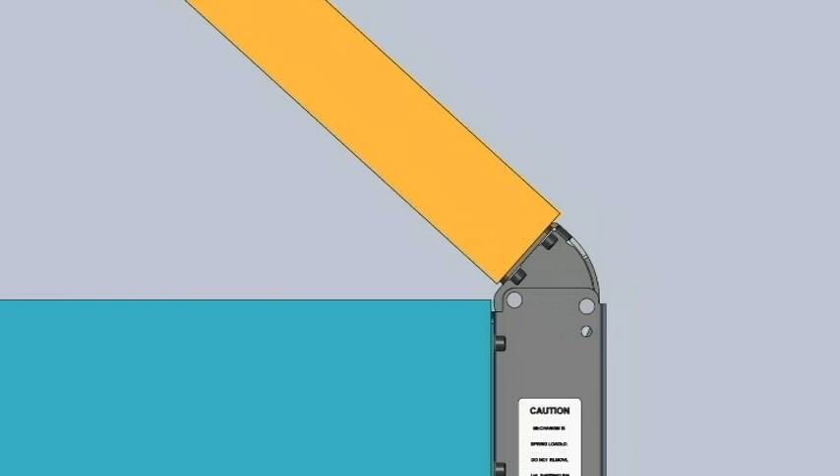If less than 90 degrees of rotation is desired, a built-in open stop can be specified in your hinge to limit the travel to an open position anywhere between 45 and 90 degrees. In the case shown here, the open stop was cut at 45 degrees when it was manufactured.

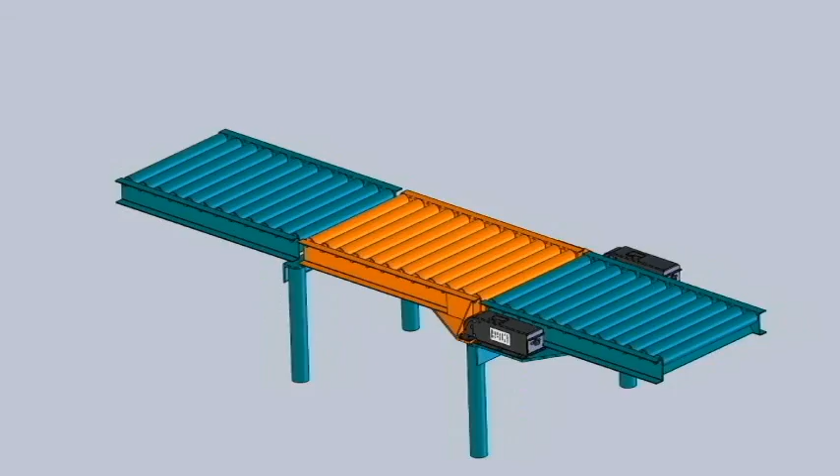For simplicity, Vectis refers to the rotating load that needs to be counterbalanced as a lid, whether the load is actually a lid, a pump, an enclosure, a conveyor drawbridge, or whatever your application requires. The VectisDYO app needs just 3 critical parameters to define the lid, or load, you wish to counterbalance.

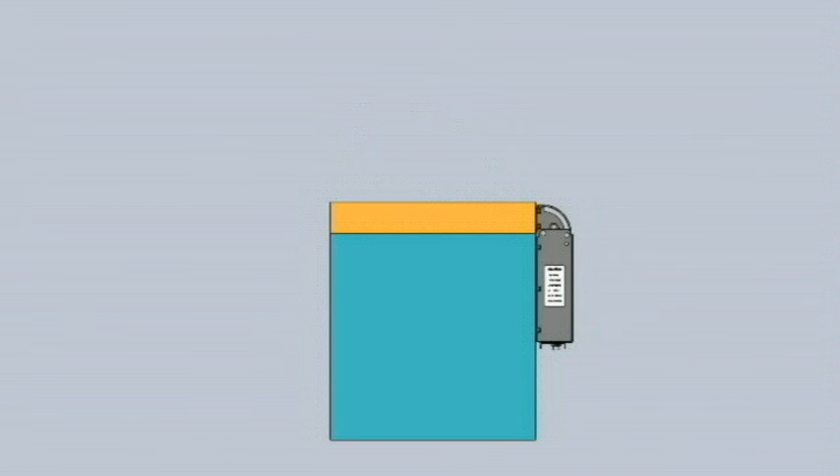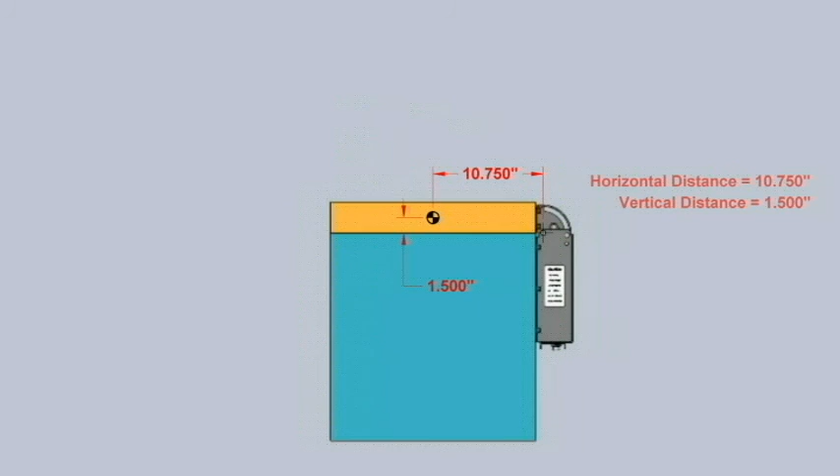In the case of the simple lid shown here, the lid is 20 inches deep and 3 inches high. This example lid is of uniform density, so the center of gravity, or CG, is in the center of the lid profile. Looking at this lid's profile in the closed position, the 50-pound weight of the lid is applied at the lid's center of gravity, or CG, which is 10.75 inches to the left of the hinge pivot axis and 1.5 inches above it.

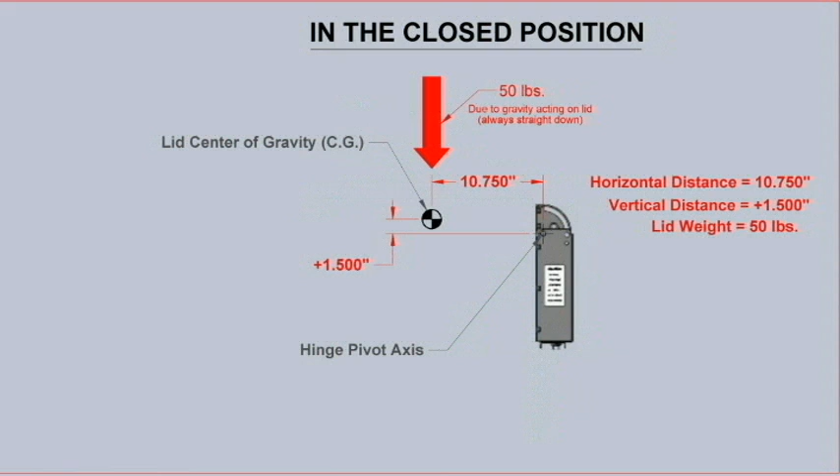Vectis always defines the lid parameters in the closed position. For this lid, the 3 parameters would be horizontal distance, 10.75 inches. The horizontal distance is always positive. Vertical distance, plus 1.5 inches is shown here. The vertical distance can be either plus or minus depending on whether the lid center of gravity is above or below the hinge axis. Lid weight, in this case, 50 pounds.

As shown here, gravity produces a downward force of 50 pounds focused at the center of gravity, which, in the closed position, is 10.75 inches to the left of the pivot axis. This means that, in the closed position, it takes 50 pounds multiplied by 10.75 inches, or 537.5 inch-pounds of torque, to overcome gravity and begin opening the lid.

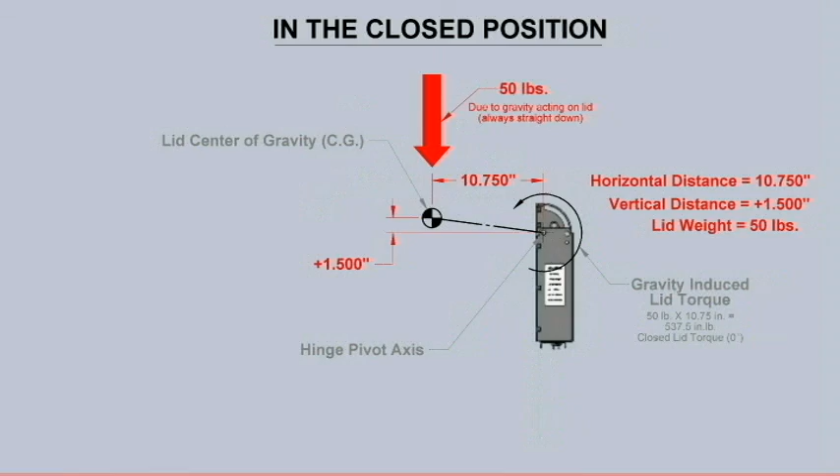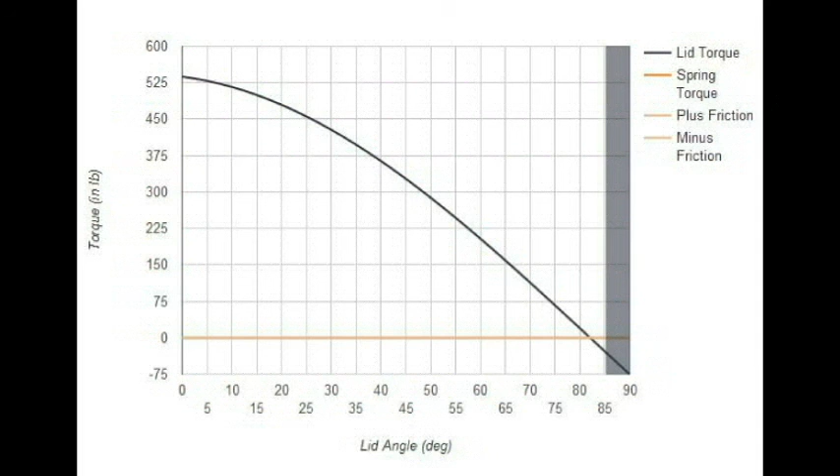Only the lid weight, horizontal distance, and positive or negative vertical distance when the lid is closed are required to fully define your lid for Vectis counterbalancing purposes. The VectisDYO app automatically plots your unique lid torque curve based on the 3 values you enter. Let's load the 3 lid parameters from the previous example into the online VectisDYO app and view the lid torque curve of the example lid.

The example lid weighs 50 pounds, so we enter 50 in the lid weight input box. Horizontal distance was 10.75 and vertical distance was plus 1.5. The VectisDYO app instantly plots the graph of the lid based on the parameters entered.

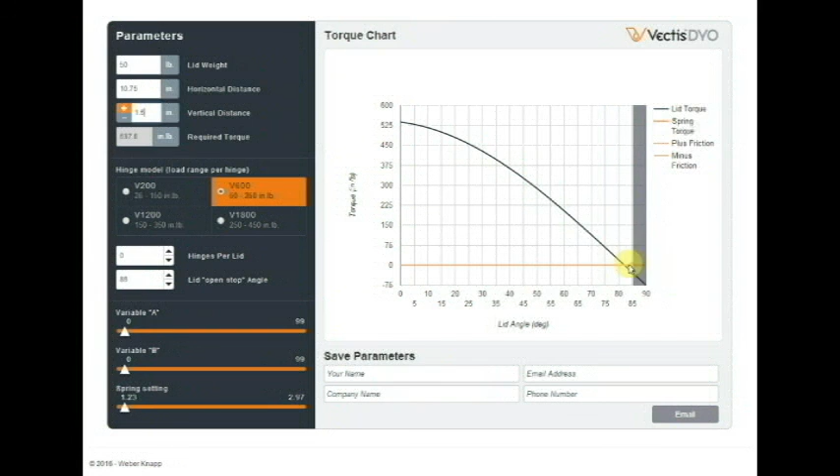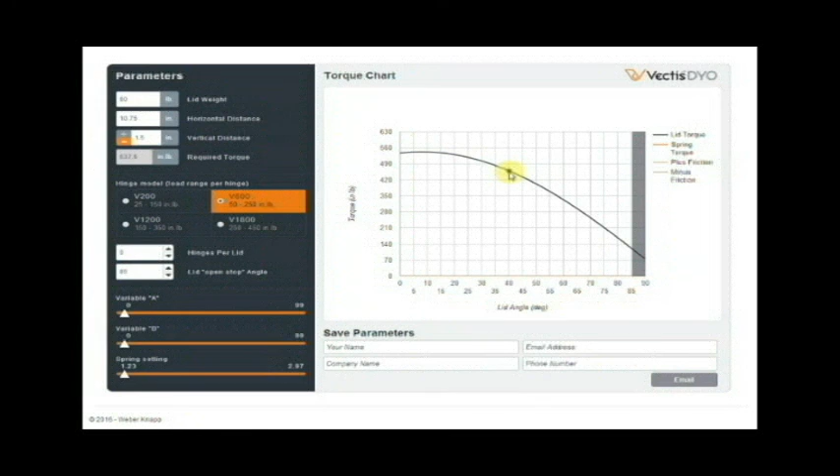By selecting the minus sign in the vertical distance input box, you can see how the curve would have looked if the CG was 1.5 inches below the hinge pivot axis. Notice in this situation how the lid torque first increases then decreases as the lid opens. We will set the vertical distance back to plus as we continue working with the original example box lid.

You can, of course, select any of the 4 Vectis counterbalance hinges and any number of hinges per lid. For this example, we will continue using the Vectis 600 hinge size selection and set the number of hinges per lid at 2. We could also choose any stop angle between 45 and 90 degrees, but we'll use the 90 degree stop for the moment. Always remember, when using the VectisDYO app, any input or variable can be changed at any time.

Next, experiment with the 3 slide adjustments, variable A, variable B, and spring setting. These 3 adjustments set the performance characteristics of the custom-tailored Vectis counterbalance hinges that you may specify and order through this online VectisDYO app. Variable A and Variable B represent geometry that will be permanently cut into the internal linkage of your Vectis counterbalance hinges when they are manufactured.

The spring settings dictate the initial spring adjustment made at the factory. The unique combination of these three factors tailors your Vectis counterbalance hinge to your individual needs. The total effect of these three adjustments is reflected graphically by the orange spring torque curve on the torque chart. The spring torque curve represents the theoretical spring-generated opening torque provided by the Vectis hinge at any lid opening angle between 0 and 90 degrees.

At angles where the spring torque is greater than the lid torque, the lid will tend to self-open, and at angles where the spring torque is less than the lid torque, the lid will tend to self-close. The magnitude of the net self-opening torque or net self-closing torque is theoretically equal to the difference between the spring torque and the lid torque at any angle.